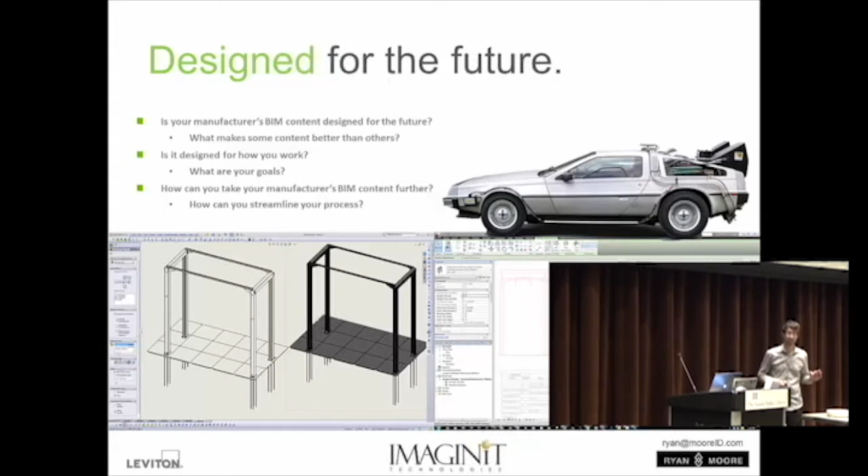The other thing I'd like to point out is today, October 21st, is the day that they travel back to in Back to the Future 2. So just be aware of that as we're going through this, it'll be important later. We might have to strip this out of the video later in case this becomes a copyright issue. But Back to the Future 2 actually has nothing to do with this slide, except that it's awesome.

Also, I want to talk a little bit about how we engage with end users, so you guys. Some of the ways we can do that is try and figure out how I can build the tools so that they get out of the way and let you do what you're trying to do. So many times you look at the manufacturer's content and you can see they're trying to do something cool, trying out a new feature. But the problem is they often lose sight of what the end user is trying to do.

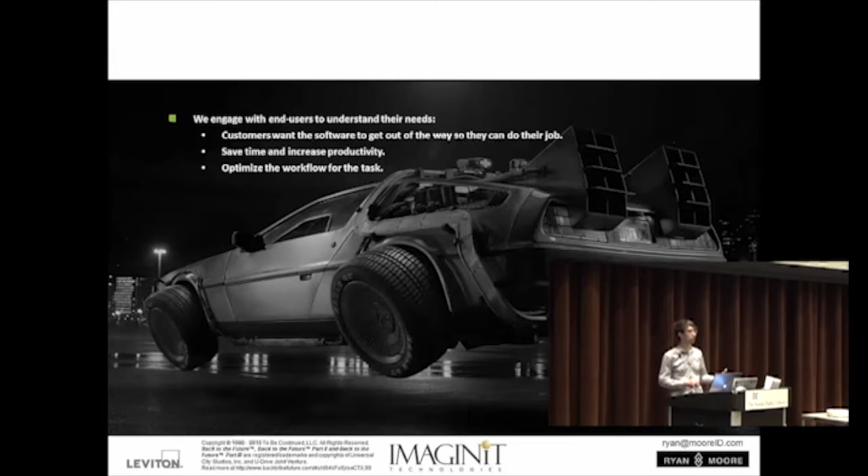The other thing that we want to focus on is how can we save you time? How can we increase your productivity? So, looking at your pain points as you're going through the process, optimizing the content for what you're trying to do.

So we're going to travel back in time, and I'm going to talk about this a little bit later. We'll come back to the whole time travel thing, but just keep that in the back of your heads. Another thing that we're going to look at is moving data into and back out of Revit, and one of the things this is going to do is improve accuracy. This is, by the way, something that many of you are already doing, but I'm going to show my idea of what that means. And then I'd like people to raise their hand and say, well, actually this is how we do it. So this is actually a chance for me to do a little bit of user research.

And then we'll also touch on creating an automatic BOM and what that can do for you. If you're already doing that, great. We'll talk a little bit about project specification and documentation, and I'm going to need some help from the audience to understand how you're doing that.

I'm going to talk about moving data into and back out of Revit real quick. And I'm thinking about Back to the Future 2 - I remember Doc pronounced this 1.21 gigawatts, and I'm thinking, that's not how you say that word.

This is a concept that I came up with, more of a proof of concept, not necessarily something ready for prime time. What I'm doing is taking data from servers and equipment in a telco room in an office building, and importing it into Revit. If you look at the colors here, these are a visual representation of some data.

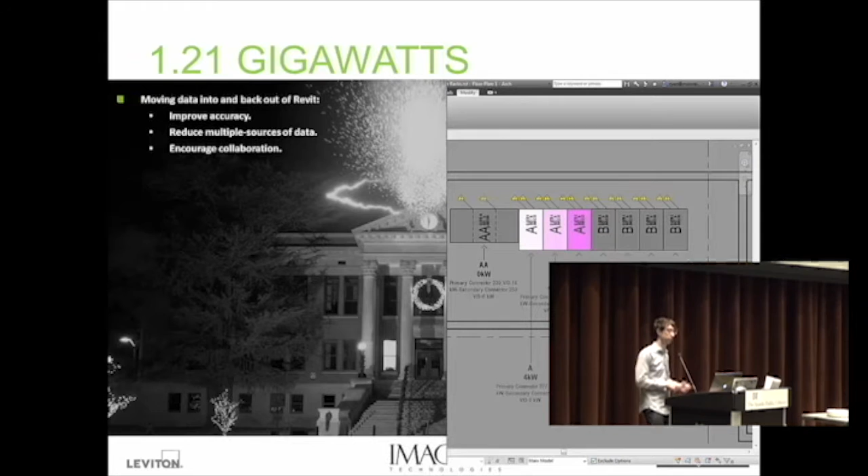We're using the actual sensors in the equipment to pull some data. We're putting it into a JSON formatted database, and then bringing that into Revit. One of the ways we're able to do that on a very low volume production level is using Dynamo. How many of you have used Dynamo?

Awesome, so we've got maybe a dozen people actually using Dynamo. If you look at my screen here, Dynamo users will recognize the yellow boxes, because that shows you what you're doing wrong. At some point you get everything resolved, and it's just like programming, except you don't have to use any code if you don't want to. It's awesome.

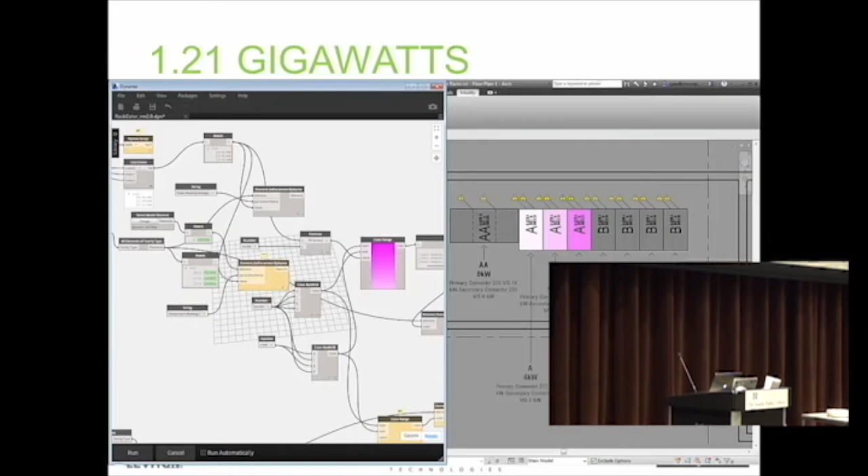So the idea is being able to move data into and back out of the Revit models, and maybe even automating some of that. Once again, the whole idea is to improve the workflow, streamline what you're trying to do, and get rid of the pain points.

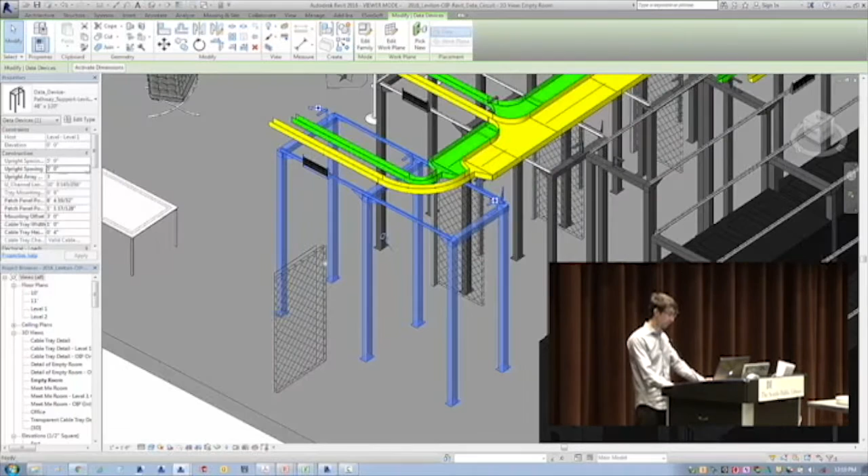So this overhead infrastructure platform allows you to run cabling, it allows you to run power, and you can do this using your existing floor. You can use it on a raised floor, you can use it on a concrete floor.

Very cool product. This is the very first BIM model I designed, and I built it like a transformer. It's got just so many features.

So for instance, you can click on this parameter over here. And while it loads, I'll talk about some of what went into this. So once again, this is before I talked to any customers, before I had done any of the user research. I'm starting as an engineer, going from the engineering direction.

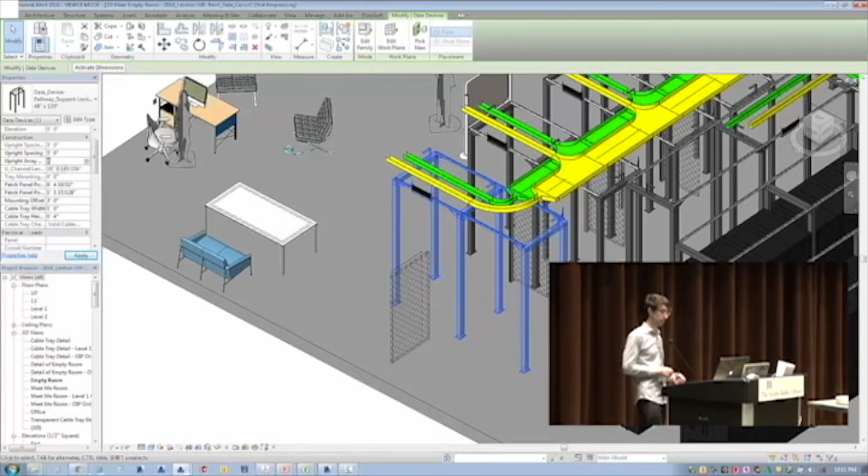As a beginning Revit user, and an engineer, what I wanted to do was use all of the things. I wanted to use all of the features. So I built this model that it flexes, it configures itself. It's a transformer.

Now, is anyone using this? I actually don't know, because we don't get metrics on that. I don't know how many people are using it. So let me undo and redo that so you can see it.

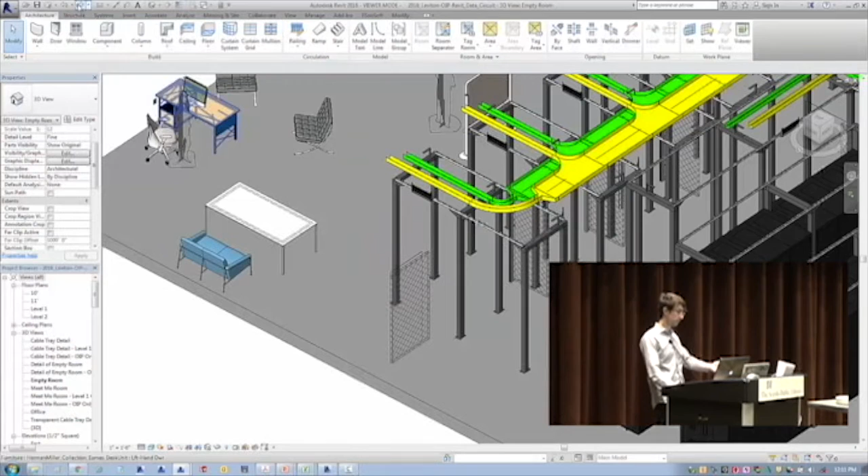So by changing that parameter, this transformer grows. Is that cool? Maybe. But really, it doesn't matter if it's cool or not. If people aren't using it, it doesn't matter.

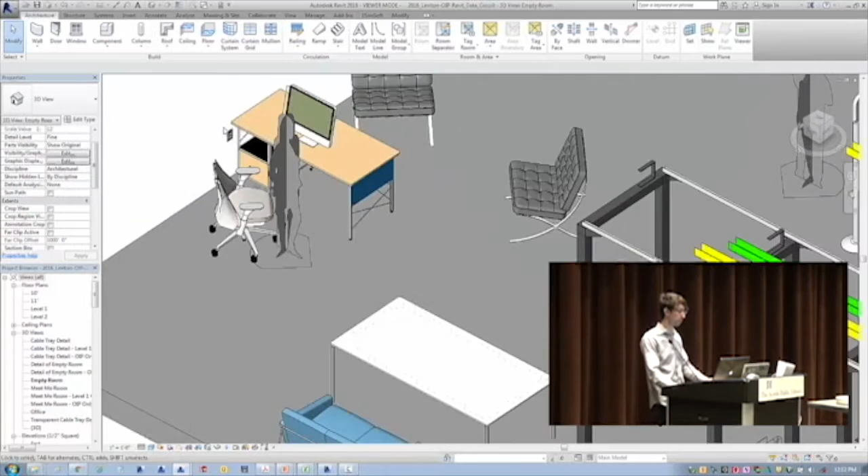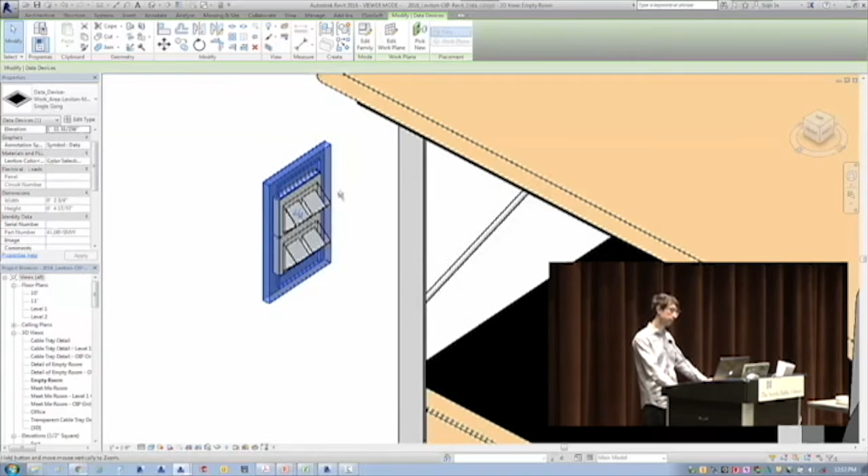So then, a little bit further down the road, I'm talking to more people and starting to gauge a little bit more feedback and gain a little bit more empathy around what people's tasks are and what they're trying to accomplish. And so now I'm building a family of data port wall plates. And now I've got this relatively detailed thing.

But now it's starting to make more sense, because people actually need these. They actually need to show them. They need to count them in their BOM. They need to configure them.

You might only show it in an elevation view. I don't know, you might show it in a detail. I don't know how you're going to use it, so I'm going to build it for as wide a user base as possible.

Now I've got, in this model, there's 250 different part numbers. And depending on the options that you select, you can select a color here. You can say I want ivory.

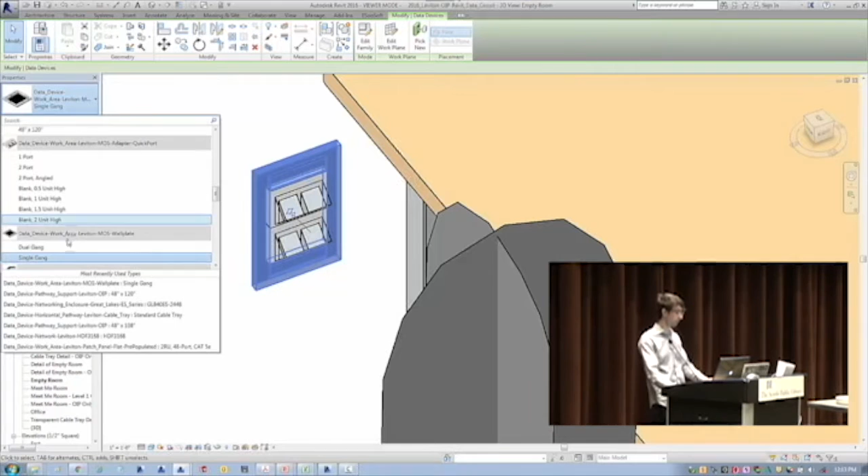And then you can configure the whole product around built-in types. You can say I want dual gang, single gang, and then it'll transform into that thing, and it'll actually change shape and do all of that.

You can say I don't want wall plate windows, or whatever we call it, head ID windows, all that stuff. And the cool thing is, at least I thought it was cool at the time, maybe it's cool, when you go ahead and put this into schedule...

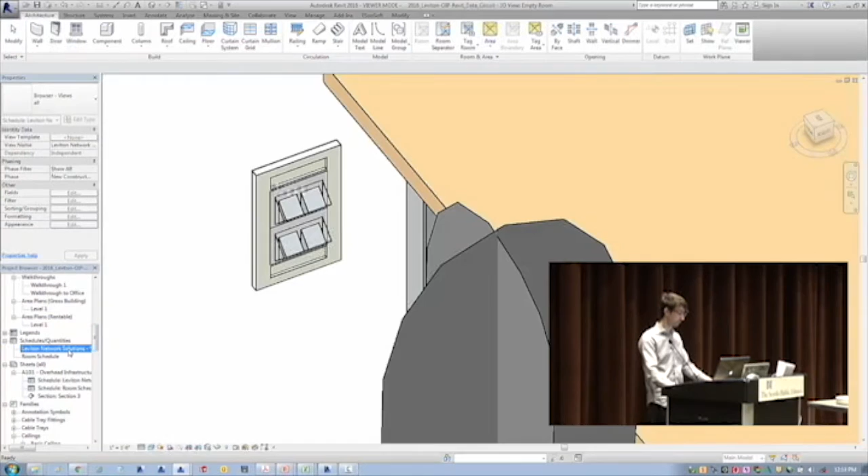That part number auto-transfers into a part number here. So now we can actually use this data. How would we use this data? Can anyone tell me how would you use this?

Who can tell me how you would use this data? Specs. Specs. Okay. Anyone else? Pricing. Pricing. Awesome. Anyone else? Install. Okay. Awesome. Install, pricing, specs. So, three different people, three different answers, and we could go on and on.

Now, is this of any use if it's just stuck in Revit? Anyone? So what do you have to do? You have to get it out of Revit. So how do you get this data out of here into something that's useful?

Well, we can run through one workflow, and let's say we're going to constrain ourselves. We're going to say we don't have time to build software, we don't have money to buy software. So what are we going to do? We're going to use what we've got. We're going to figure it out.

So I'm going to go ahead and export this data. Save it out as a CSV or whatever.

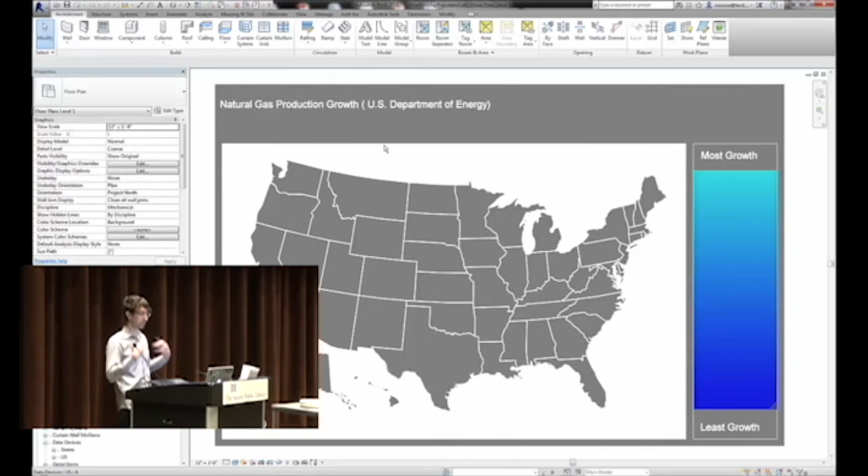In this case, I'm using Dynamo. So those of you who recognize Dynamo, you'll recognize this sort of layout. What this allows me as a designer to do is get into the programming parts that my software developer friends are dedicated to, and I can start to get my hands dirty. This goes back to building prototypes. If I can open up that toolkit, bust out the Legos, now I can start to brainstorm with my hands, and now I can start to make some progress.

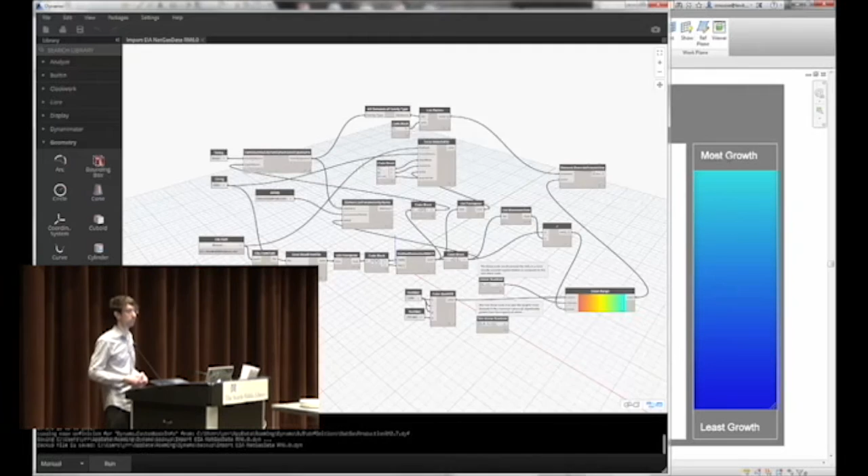And so when you're using Dynamo, you're actually coding, using a visual representation of code. Let's call it scripting - okay, so you're scripting. And in this case, I'm designing around my motivations.

I was recently in Pennsylvania visiting some family, and the news, what everyone's talking about there, is the hydrofrac. Let's see if I can find... okay, so this chart right here, this is from the US Energy Department, and this chart shows in the past 5 years the kind of hockey-stick-style growth that natural gas production has seen in Pennsylvania.

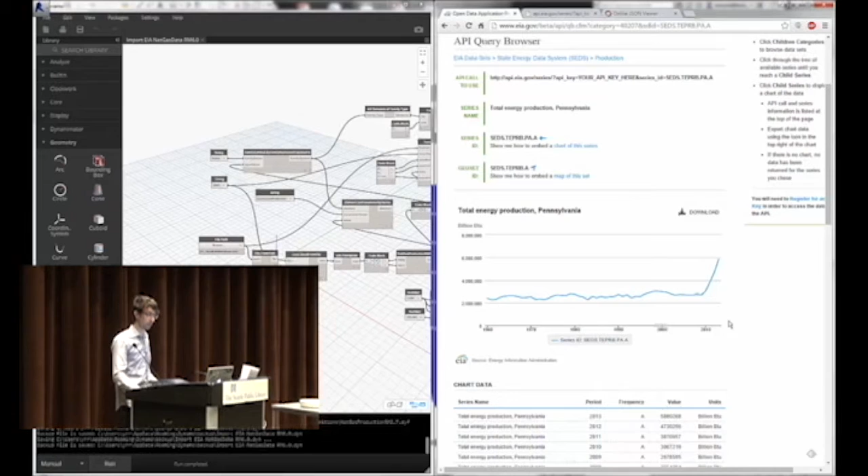So now I've got this story, I want to investigate it, I want to dig a little bit deeper, and I want to build a model in Revit to do that. So let's see if this actually works in a live demo. Let's see.

Now I've got colors that are representing growth, so the natural gas production growth.

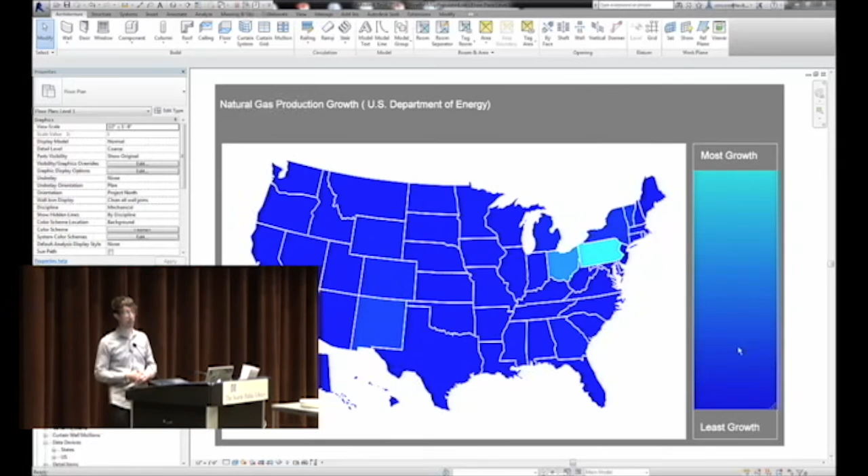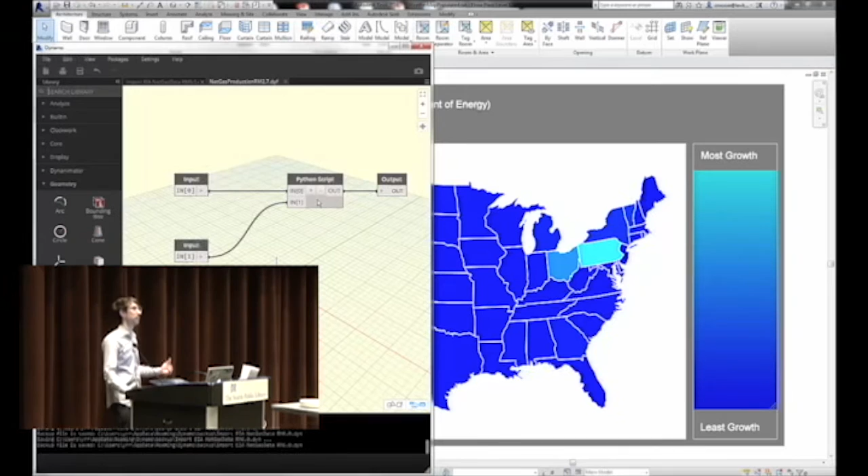When we're talking about collaboration, we're talking about moving data. We're getting this data and pumping it out of Revit, or we're gathering it. In this case, we're actually gathering this data from a JSON database on the EIA website. So we're using Dynamo and JSON, and we're digging up this data. We're running through.

I'm not going to spend too much time on this, but just for those Dynamo geeks in the room, I'll show you the Python code. I'm so excited. So I'm iterating through 50 times, and I'm grabbing the data.

And then I'm traveling back in time, see what I did there, to 2010, and I'm comparing that data from 2010 to 2015. And all of this is to tell a story.

This is my story for me, and now for you guys, for better or worse. So the idea of collaboration, and being able to do that with these tools that companies like Leviton and people like me build, and people like you build - my dream is to see all of those things work together. And if we can get closer to that, then I'm happy.

So when I started this talk, I was talking about streamlining workflows - building an automatic BOM generator tool, generating project documentation. These are things that we can do today, but I think we can get better. I think we can do a better job.

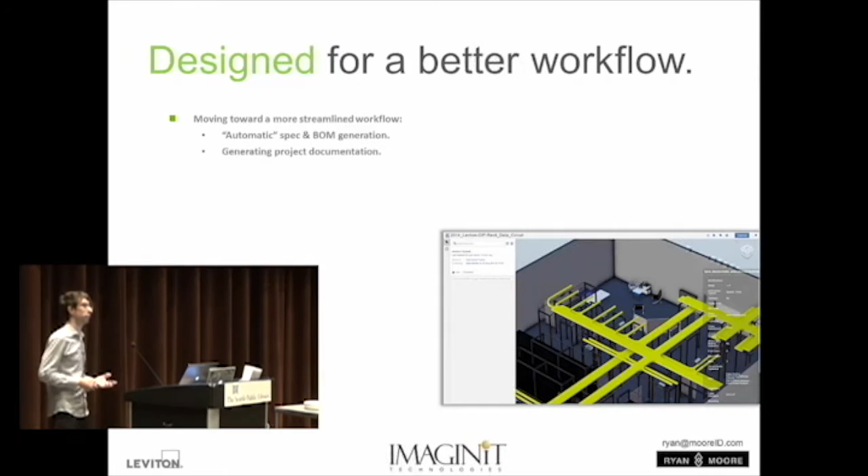I showed you this example. I showed you the manual pulling data out of Revit, putting it into something else. Could be Tableau, could be Excel.

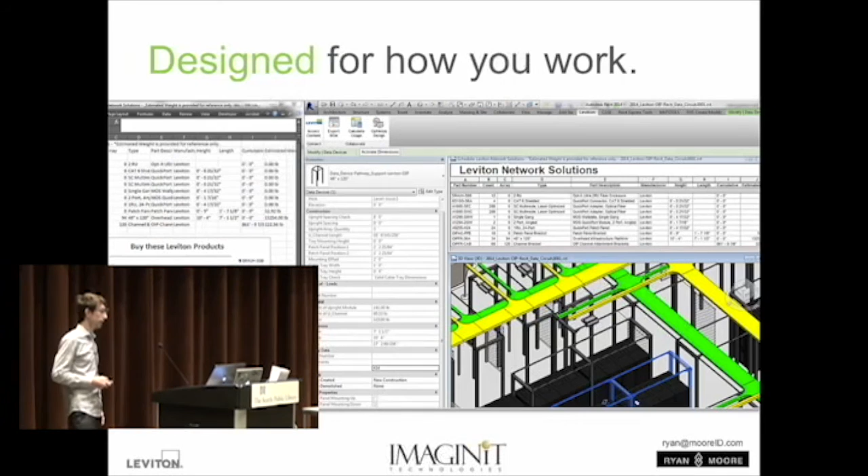And what I'd like to do is get a show of hands. Who would like to see Leviton make that automatic? So you can do that data transfer, you can spec those things, you can build an order, and you can send it to your engineer. Who wants to see that? 2 people?

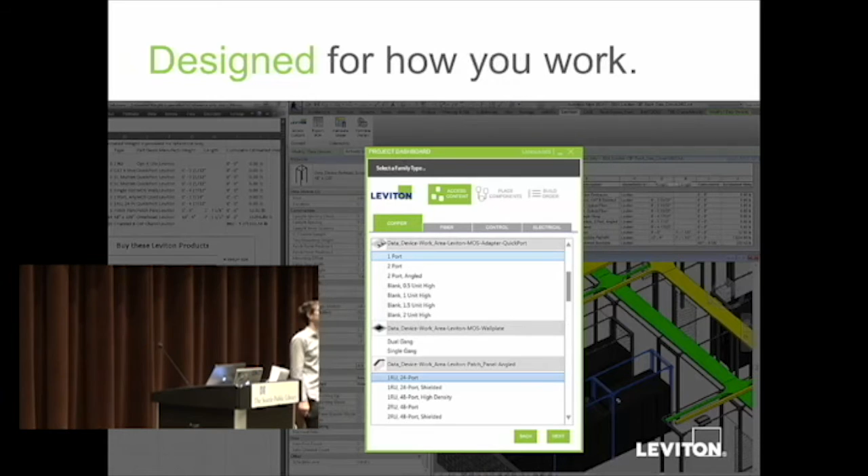All right, let me ask you this. What would you rather see? Are you happy? I'd rather you teach us how to do it. Ah, you're the engineer and the architect.

Yeah, the engineers that I work with, they don't want solutions that solve the problem. They want to be enabled. And that's awesome. That's awesome.

What other, anyone else? What would you like to see? If this isn't interesting, what is? Models that can scale back, very detailed, to just a few blocks that are easily shown.

They're smaller in size, that don't have to edit family, and then leave a bunch of stuff that we don't really want to see. Awesome. Because then you have a bunch of those in the model, and the file size is so big.

It manipulates poorly. So the comment was models that can scale so that if what you need is a small file that's just a block, you can have a much more efficient file. And then if you want to use the fancy file that manufacturers like using, that has all the built-in part numbers and parameters and all that stuff, you can do that. More standardization.

The manufacturer has at least 3 different families. One particular type, one is a simple model, one a little bit more detailed, one full scale. So we're talking about 3 separate models designed around the type of user - whichever one we want to de-engineer or go from.

Or usually placeholder blocks. Got it. So your models are for every user's needs.

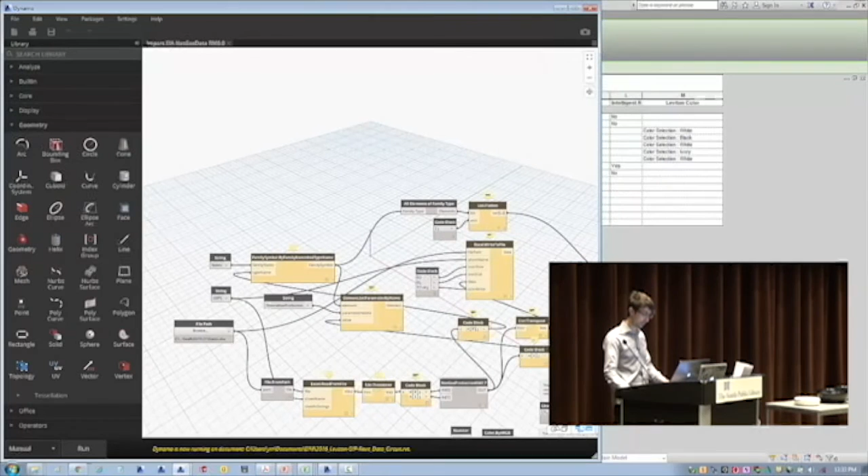Good question. Okay, real quick, I'm going to zoom into this data center model that I have. Let's hop over to the plan view. Don't make fun of my plan views - this is an industrial designer trying to do a plan view.

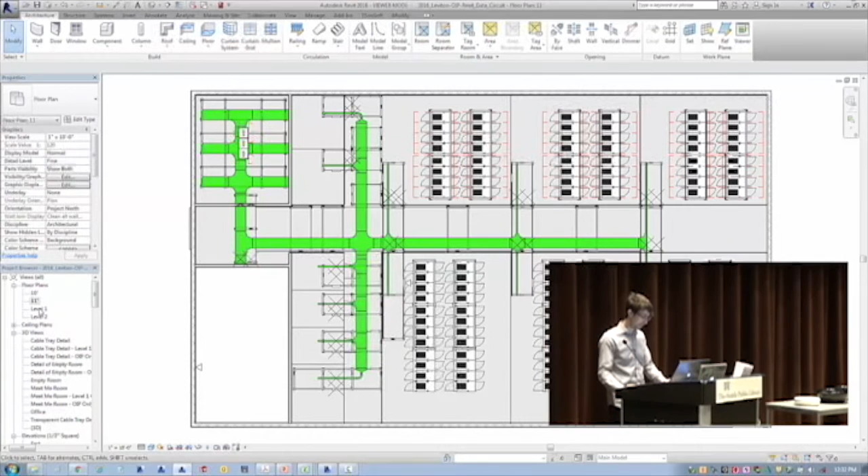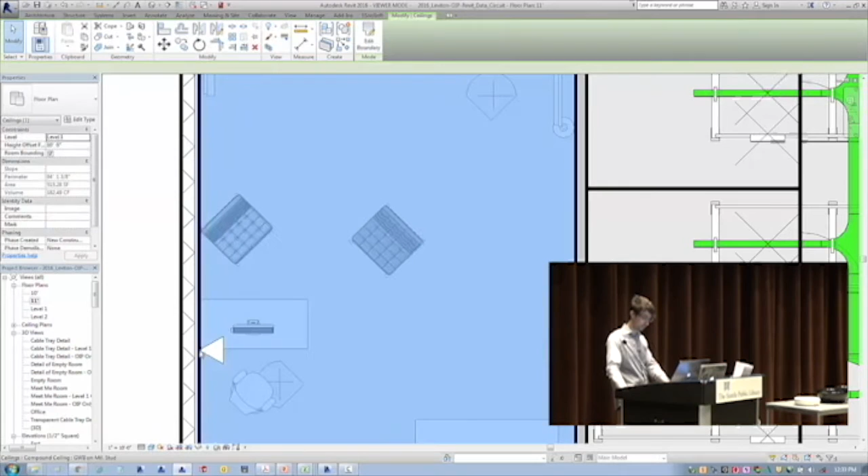So here you can see I've got - let me try a different one to see if it still shows up. So yeah, I've got it turned off here, and then I've got it turned on here. So this is what I'm using for... what is this for? Not sure I can select it, but data, phone, tel data.

I don't know if that symbol in your family has 20 different representations associated with it. I need 20 different representations in plan to communicate each one of those. That's good to know - each one of those is a unique specific object and point that needs to be communicated. So the comment is, in this plan view, this symbol doesn't do a good enough job - it only represents the two points. Right, what about the four?

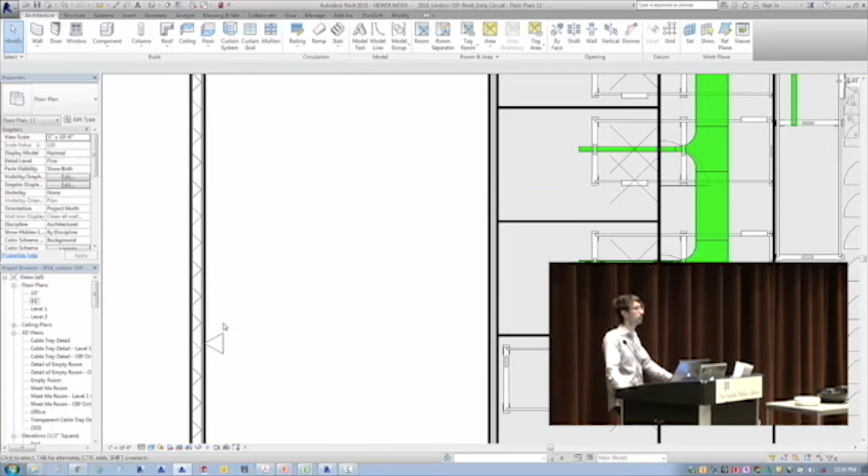Do you care about colors? No. So yeah, that's a very good point. Now, would you use symbols, or would you use - what's the Revit term - keys? Well, we have families, symbol families, annotation families. I guess the point here is something I want to expand on what you said.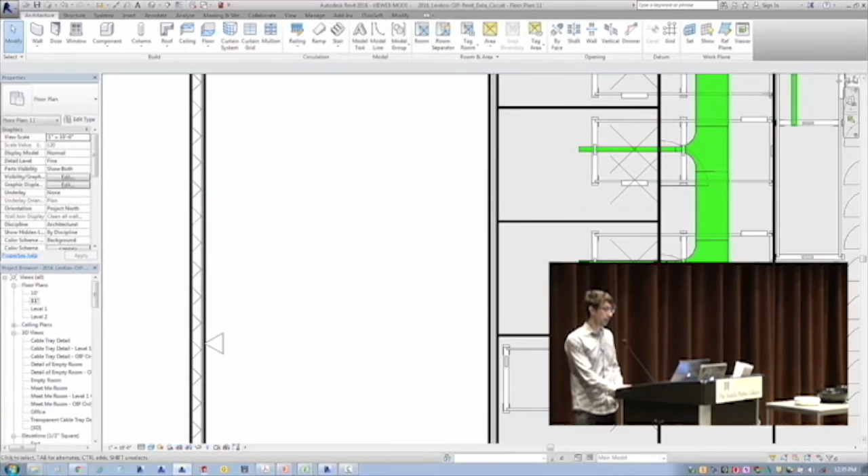The thing here is that from the engineering side and pushing further out to the construction side, most of what people will be looking at is plan documents, not three-dimensional views. Maybe if somebody's assembling something they'll pull out a three-dimensional view, but most of them are going to be looking at plans. We have this whole vast selection of little plan symbols, every office has them and they're sometimes all different, that denote things like two gang, four gang, light with regular light, emergency light - it just goes on and on. So that's from the viewpoint of the engineers and contractors. Those are pretty important.

To expand on that, in operations, the guys at the facility - what we keep hearing is, oh we want a BIM model, oh we want a Revit model, oh we want this ridiculous database. But what really is needed is a simple, open plan base or a list base BOM that has the important data - the correct product number, the correct legends that are black and white printable, and that are scalable, so you can access it whether it's PDF or Excel or whatever. We've been dealing with multiple standards across various industries, sub-industries and disciplines looking at really interesting stuff to create content that is usable.

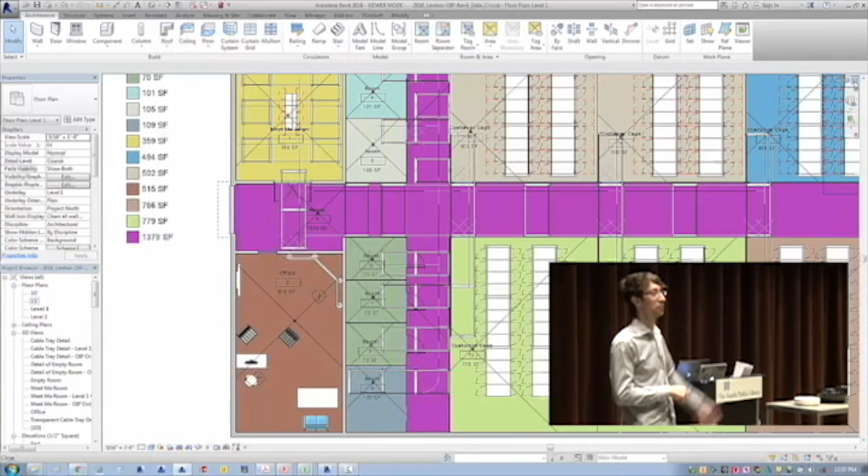I think that's a really valuable point too - the idea that we use Revit, but just because we use Revit doesn't mean the owner uses Revit, and it doesn't mean the contractor is using Revit. I forget that, I have to remind myself of that, and that's a really good point.

One thing I've noticed is that every manufacturer has a different thought process behind their mechanical or pumps or whatever it is. A lot of times when I'm developing some kind of schedule to track this,

water, whatever it is, I usually have to make my own plan. I have to look at the manufacturer and see exactly what they call the parameters and how it matches to what the parameter can actually do.

Part of the problem is there's no standardized principles or concepts that all manufacturers follow, which makes it hard. So we have a view with parameters and schedules, and if we decide to use a different manufacturer, you can't put it in the same schedule - we would need it to match up.

That makes sense, that's a good point. So the comment is around: if you spec one product and say the building requirements change, and you need another product to replace that, they're not easily swappable - is that kind of getting at it? Not all parameters will match the same way.

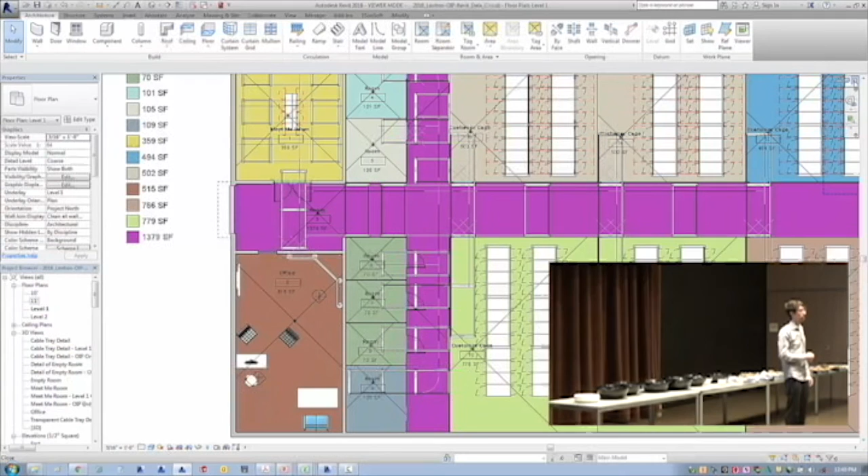It's a challenge. What I often do is maintain our own shared parameters file. If I get families or whatever, I don't even look at the ones I have - I just put my shared parameter onto the schedule, whatever it may be.

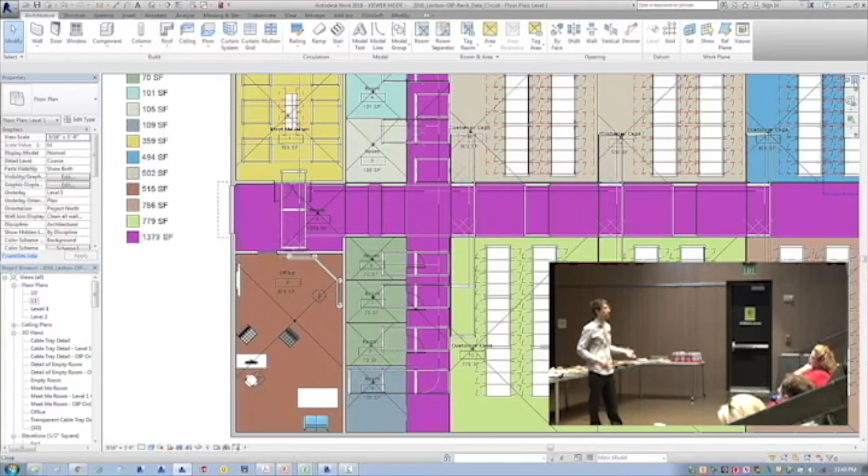Have you tried using any of the automation tools that some of the great developers make? No, I haven't actually - when I looked into plugins for sale,

Are you familiar with the Revit API and how programs can use it to reach into Revit and move things around? Dynamo has access to the Revit API, and for the most part it has access to everything you can do with the user interface in Revit. So if you can click a thing, you can do it in Dynamo. If you can change a parameter, you can do it in Dynamo. And it's actually really powerful.

You can extend it with Python, you can build Excel tables, pivot tables, it's just awesome. So I encourage you to learn Python if you have the time. If you're not a programmer, like I'm not, it takes time to get it up and running, but I think it's really powerful.

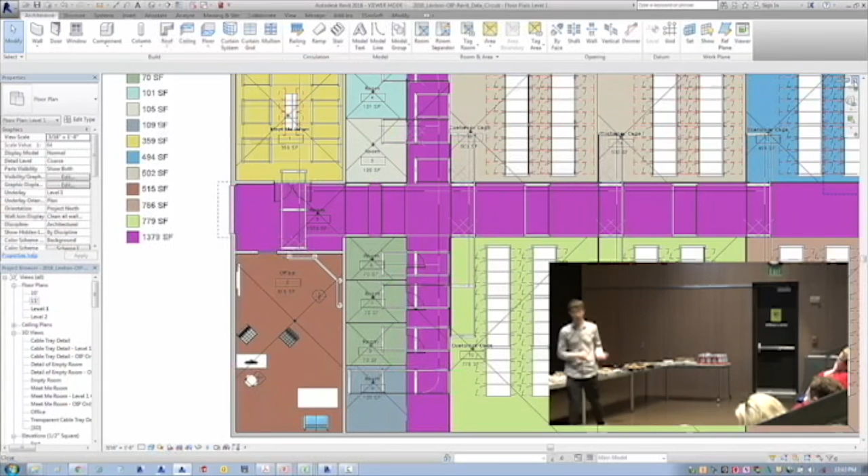One of the comments I'll have about most manufacturers is most of our stuff is symbolic in nature. So when you put your little triangle, it's about 12 inches wide, when you try to put it next to an outlet, you really lose functionality of the real part. So when you find a manufacturer that doesn't have the ability to manipulate the symbol along the wall, stack it out the wall, it's kind of...

So how do you get around that? Or what do you do when you run into that? Let me just reiterate the comments. So the symbols, we were looking at that triangle symbol. Sometimes those are at the manufacturer's discretion. They can be whatever scale the manufacturer decided to make it. They'll follow whatever standard the manufacturer decided to follow. And the chances that that's going to match up with what you're doing are not very great.

So how do you get around that? That's interesting. So would it be easier if the symbol wasn't even in there to begin with? Well, in the example you showed, it's like that.

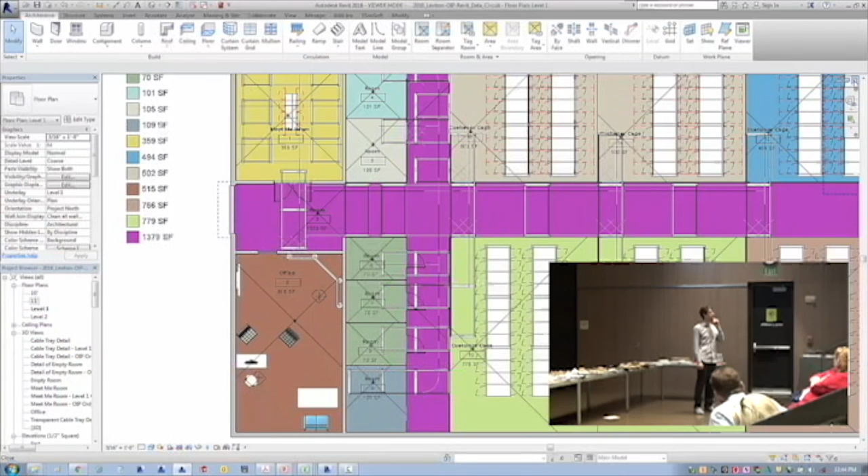Now, do you mind if I ask what trade or background you're coming from? Electrical. Okay, so that's actually a really great example. And depending on not just what trade you're coming from, but what your role is, your needs are going to vary. There's no one-size-fits-all.

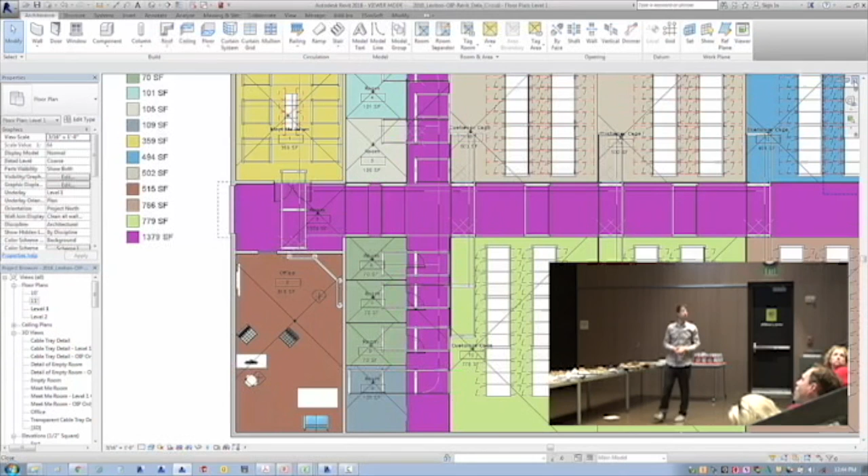When you're talking about symbols, some of the trade associations do standardize them. Different offices use it, but for instance, I know the IES has a set of lighting symbols. Just about every office I know uses it. If you use the IES symbols, at least you've got something that everybody's got in hand. I don't know about other industries, but I'll bet NEMA has a certain amount of symbols for graphics, and I'll bet the structural engineering people do too.

But you can always go to the standards organizations. They're often your friends. But at the end of the day, you have to pick—you can't build for all of the standards. There are many contradictions. Okay, that's a good point.